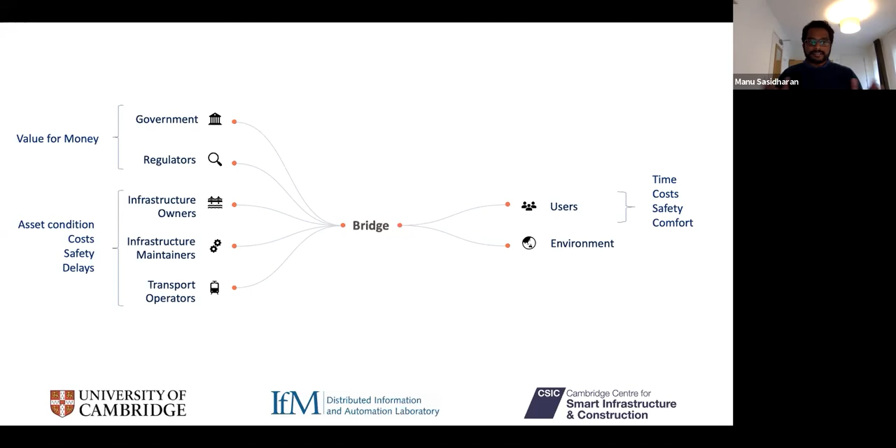So ideally, a single bridge will have multiple stakeholders who will have different priorities from that. And these multiple interests need to be captured and considered while managing the bridge to improve the value of our transport system. So why is it necessary? Because when we are setting up a business case for monitoring or any other decision within our asset management strategy, it is necessary to see how it impacts our different stakeholders, if it benefits them or how it impacts them.

So managing transport infrastructures or bridges are often considered at two levels. One is at the network level, another one at the project level. So while the budget availability drives the decision making at the network level, the engineering or the asset condition or even the structural health of a bridge triggers maintenance interventions at the project level. But knowledge on the actual condition of the asset plays a very important role within decision making at both levels.

However, what we see is that due to infrequent inspections and lack of continuous monitoring, we often do not have adequate information on the condition of the bridge. For example, in terms of defects like bridge scour, we do not have much information because inspections are quite less, or the frequency of the inspections is quite large. So this gives rise to uncertainties within our decision making.

So the visual inspection, which is commonly used, is less accurate, and continuous monitoring using sensors or satellites gives us a better value because it enables a smarter and a proactive asset management. But again, as Jennifer mentioned earlier, there is a lack of a business case for monitoring bridges and managing them effectively under such constraints of budgets or resources.

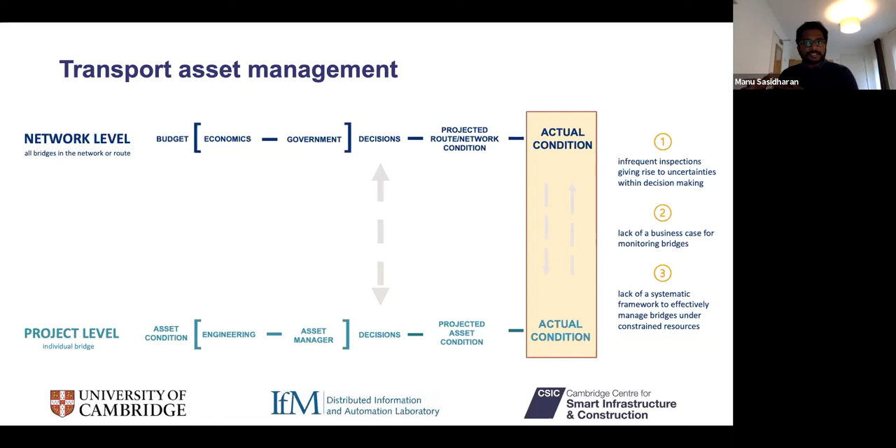So we have developed a risk-informed approach to arrive at such a trade-off. So the trade-off between the costs and the value of information gathered through these different monitoring techniques against a given risk level of failure of a bridge. So in other words, preparing the business case for monitoring.

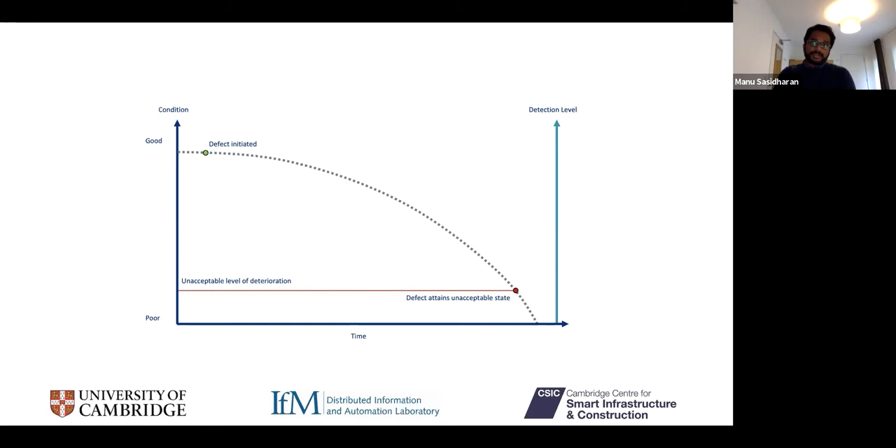So let us consider this situation where over time, a defect is initiated and it will reach a point where the defect attains an unacceptable state, which might result in a risk of failure or closure for a prolonged period of time. So with impacts of climate change coming into picture, these defects might attain that particular unacceptable state at a faster rate, for example, in case of scour as well. So it might become detectable during a detailed examination or monitoring before it is detected during a visual inspection.

So for any bridge, the level of detection is related to the structural form of the bridge. It dictates whether the relevant bridge elements that we are going to monitor, be it your pier or your deck, are accessible for examination, and to what extent they are accessible. And also to what extent does that particular defect, be it a crack or scour, manifest itself visually?

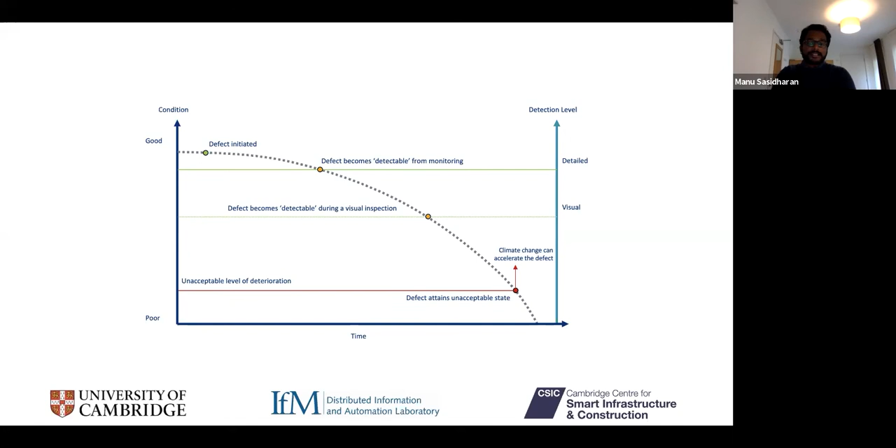So as we mentioned earlier, a visual inspection would have a high level of detection for a crack on a masonry arch, but a much lower level of detection for bridge scour. So the earlier the defect is detected, as we all know, or even predicted to occur, the better it is for maintenance and repair regimes in place.

But in case of the UK, we cannot take bridge safety for granted. And as we said earlier, the condition of the asset drives decision making across the network and project level. And we have a lack of comprehensive asset condition data when it comes to bridges. Approximately 40% of our 160,000 bridges are historical assets. And with a current annual maintenance backlog of approximately 4 billion, one of the major challenges that we are facing is to make our bridges resilient to a changing and uncertain climate.

And with climate change coming into the picture, it was reported that 1 in 20 bridges are at high risk of failure by 2080. So bridge asset managers often need to make decisions on the basis of incomplete and uncertain information due to the lack of asset condition data or even continuous monitoring.

But while we commonly employ visual inspection, which is less accurate when compared to continuous monitoring using sensors, it was estimated that spending £1 on infrastructure monitoring technologies on our bridges or even transport infrastructure could result in a potential cost saving of over £3.

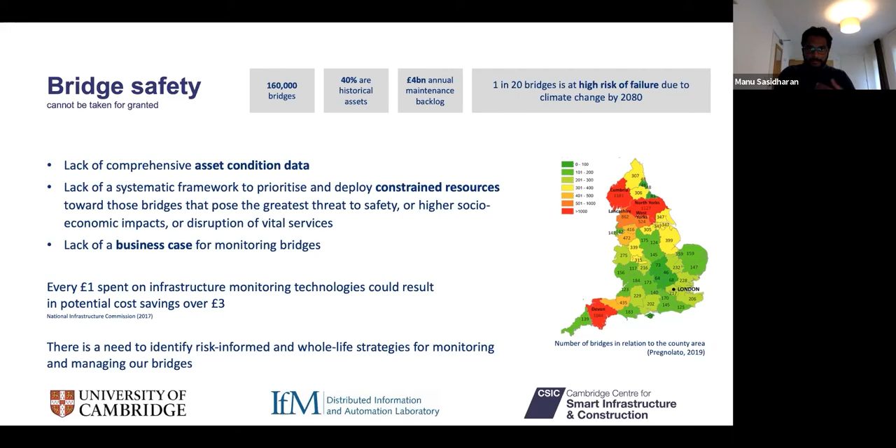But having said all that, we do not have a business case or a systematic framework to see where we can prioritize that monitoring investment. It is often the case that we say we are going to monitor the high-risk bridges first and then go on. But even within that high-risk category, which bridges do you focus on? So that's the question we are trying to address. We developed a risk-informed and data-centric approach that would allow us to make that value-based monitoring decision.

To take a step back, when we are assessing and maintaining our bridges, or even preparing a business case for any of these asset management strategies, a very sound understanding of the operational impact of that particular bridge, or the consequences, is necessary within the so-called risk assessment.

So in case of extreme events like a bridge collapse or flooding, which might result in lane closures or damages to bridges, the unplanned loss of transport capacity could necessitate traffic redistribution for a prolonged time. That redistribution could be rerouting road to road, or people moving from road to rail, or if it's a rail bridge, rail to road.

So you have that modal change, which brings its own complications of increased fuel emissions, accident risks and congestion. On top of it, it could also bring a significant increase in user cost due to longer travel distance. Prolonged disruptions can impact not just user cost but also local businesses in that area, and might even bring a risk of social exclusion to the affected communities if you are cut away from the mainstream for more than a couple of weeks.

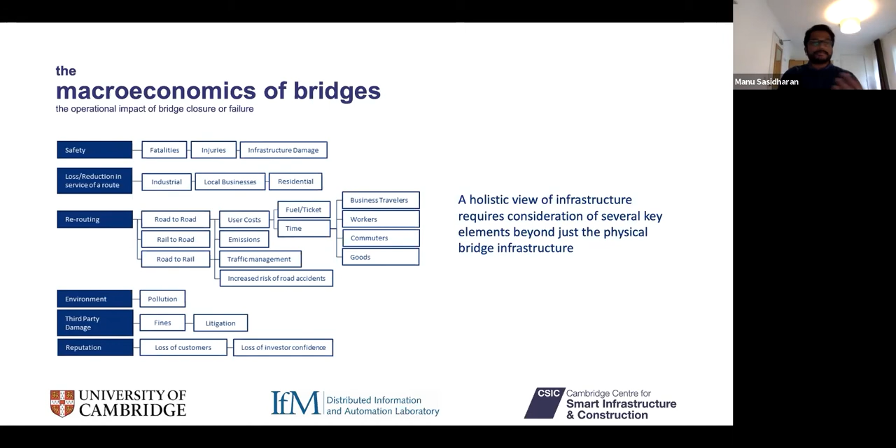Now, probably the only quantified example of these macroeconomic impacts of bridges would be the Forth Road Bridge closure, where it was closed for 3 weeks due to structural defects, and resulted in a detour of 40 minutes for around 10,000 households. It was reported that this journey increased from 40 minutes to 3 hours because of the increase in congestion.

We also see that because of the increase in time, there was a shift of car and bus users to railways, so additional rail services had to be introduced to meet that demand. Finally, the closure of one carriageway alone was expected to cost the Scottish economy around £650,000 per day.

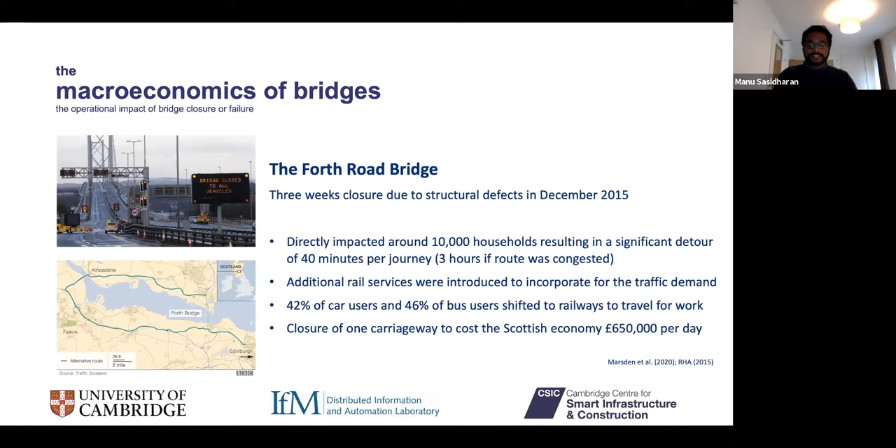So given the values we see for bridges within our transport system, like that example, it is quite important to be able to predict these kinds of consequences, and not just predict but also quantify them, so that we know what impact they would have. Considering such impacts will aid transport agencies like Network Rail, Highways England or local authorities to identify user-centric and value-based strategies for maintaining or monitoring their bridges. A key part of such a process is to identify the bridges at most risk while considering their operational, structural, functional, and environmental standing.

And that could be not just overarchingly for a bridge, but for a particular defect. For example, if you take scour as an example there, you might find that some of those consequent factors which result in scour might bring in a higher risk versus a crack. So I'm talking about a generic approach here.

So since the likelihood is governed by these different contributing factors, the magnitude of these consequences is often mediated by the life cycle costs and the macroeconomic impacts that we discussed earlier. So what we're thinking is that the value of information approach will provide us a standard for acquiring and using data while carrying out any of these management activities.

So it will help us to understand what is the best monitoring strategy for a bridge assessed to be of a particular risk, or even identify which bridges to monitor and to what level they should be monitored, or even what should be my inspection frequency if I'm not going to do any monitoring. So that discussion happens when we bring those approaches together.

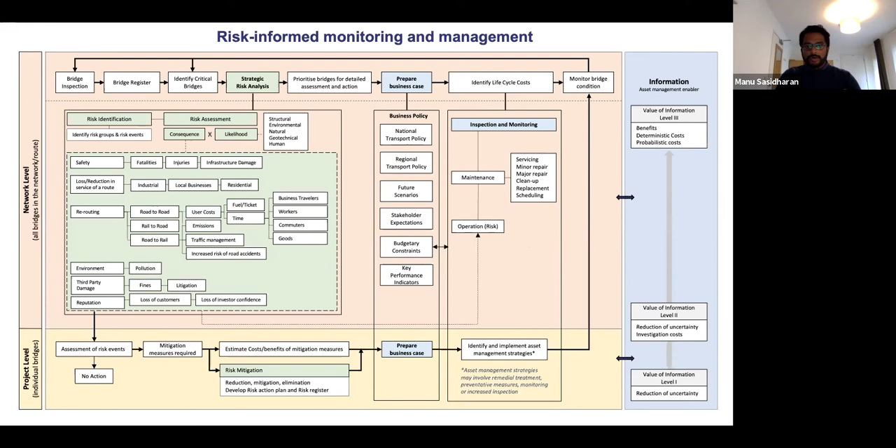So you might find that when you prepare a business case and compare it while having a whole life cycle perspective there, you can identify strategies like, okay, I'm going to monitor or increase the inspection of my bridge, or even bring in remedial treatments or even preventive measures.

So with that framework, we have had discussions in the last couple of months with Network Rail and Highways England. That whole framework, as you saw earlier, was developed with inputs from them as well. And during our discussion, predominantly with Network Rail, they highlighted that their current scour risk assessment process is unable to quantify the impact of climate change. I should mention that we said we'll have that framework and then bring in scour as a case study to explain it. So Network Rail said we do not consider climate change there, and we are starting to think about it.

So we're now working with Network Rail to explore the relationship between climate change and bridge scour by simulating the causal chain from climate change to the scour risk, so the whole risk assessment process, trying to see how climate change will impact that. To start with, we adopt the UKCP18 projections to study the change in precipitation in the coming years under different scenarios.

And then we employ hydrologic modeling, which will estimate the river flow based on terrain, land use, and soil conditions, which would inform our time-based scour deterioration models, which we are adapting from literature to calculate the scour depths for these different climate scenarios in the future. So having done those three steps, it would then inform our risk assessment process, which will consider the probability and the consequence of bridge failures due to scour, both at project and network level.

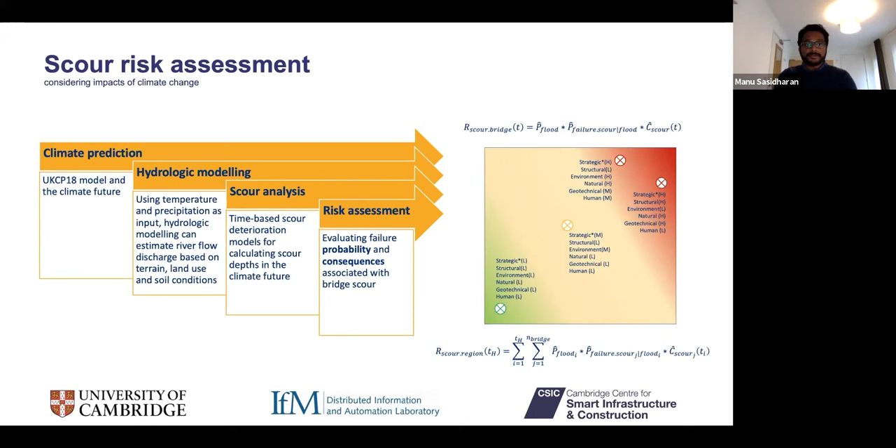So again, the probability will be calculated using a pairwise comparison approach of different contributing factors, and the consequences will be calculated using econometric models, which consider the macroeconomic impacts. So that's one project which we have started with Network Rail to validate the framework and the approach that we have developed.

So from that picture, we then start to ask, how can we deal with scour? The efficient and cost-effective way of dealing with scour is to monitor its evolution over time, and accordingly decide how to bring in maintenance and repair works. The commonly used bridge monitoring technique is visual inspection, and divers are often employed to inspect the condition of the foundation and to measure the scour depth using basic instrumentation.

But such an approach is particularly a disadvantage during flooding, or even in situations when climate change induces high floods, where the risk of scouring is extremely high and diver inspections cannot be carried out due to health and safety considerations.

So an effective alternative in such a scenario is to employ instruments such as accelerometers, sensors, or satellites to gather data related to scour depth, and not just the data about the scour depth, but also the different factors that contribute to scour formation. Can we look at how the surrounding area or the terrain of that area impacts how the scour behaves? That sort of information capture will help the decision makers.

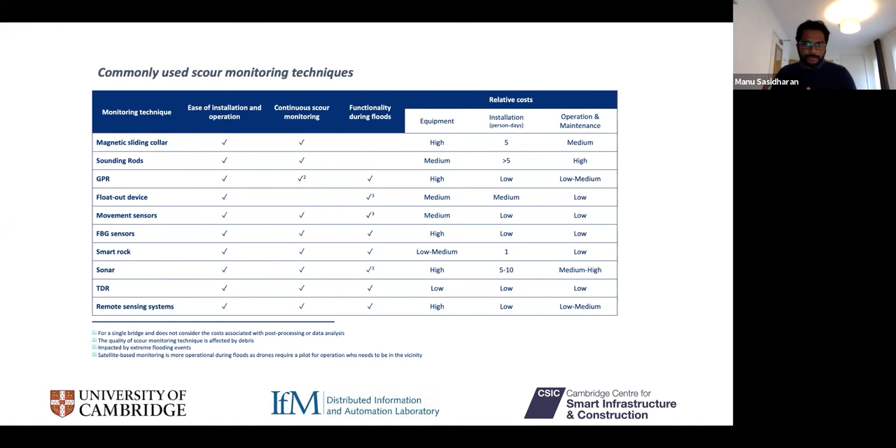But having said that, from that list of different techniques that we have, each technique will have a different level of cost effectiveness, resolution, or capability for providing repeated and reliable information. There might be a different cost when it comes to installation or even operating and maintaining it. So how do we choose which one to go for within our risk assessment framework?

To that end, we developed a value of information technique, which is a decision analytic method for quantifying the potential benefit of additional information. Thinking back, the essential driver for infrastructure sensing or monitoring is to create a value of investment versus the gains you might gain downstream if the sensors are put in place. For example, if I'm able to detect a defect due to monitoring, and if it is an accurate detection, then it would trigger a maintenance decision much earlier than a visual inspection, and accordingly help reduce the failure risk or even closure risk. So what's the benefit of getting that initial information?

For new structures, like the bridges that HS2 might have, the emphasis might be on giving an early warning detection system of deterioration happening or a defect going to happen. While for existing structures, which is predominantly what we have, the emphasis will be on the monitoring of the already active deterioration processes, trying to see if that deterioration process is getting aggravated, getting that live feed, if that's the word to use.

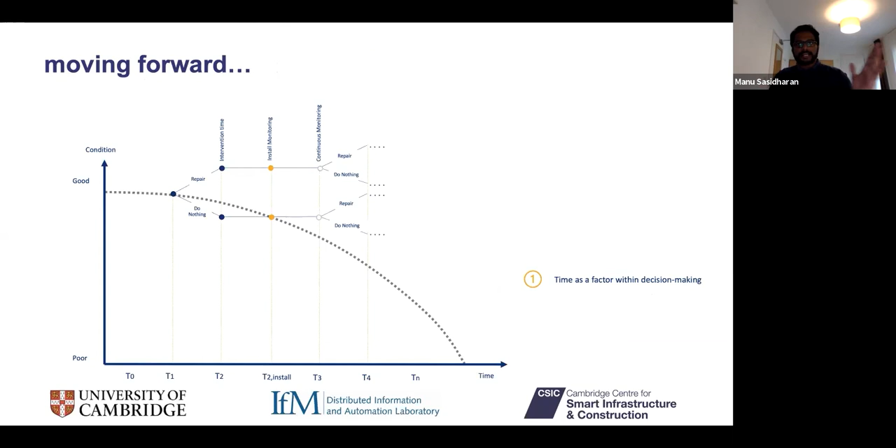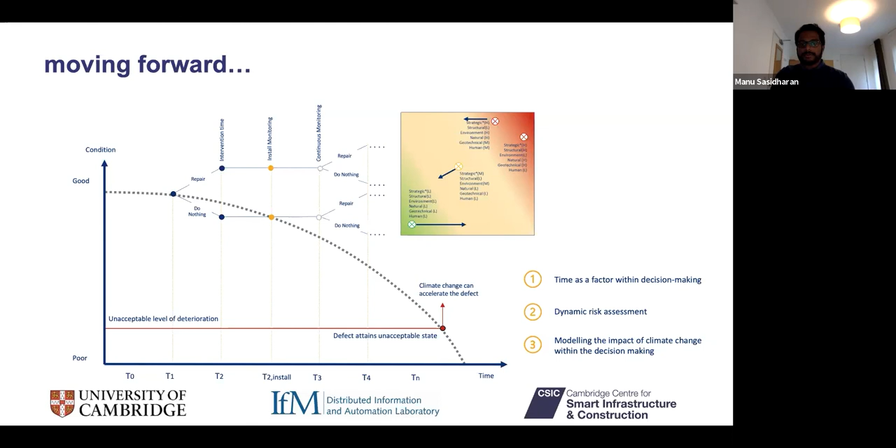Moving forward, the work will firstly look at making the proposed approach time dependent, which will also help us understand how this time dependency affects the value of our asset, and also if monitoring was initiated at different stages. Dynamic risk assessment is also being looked into, to make risk assessment a function of time. And finally, as we said earlier on the Network Rail project, we're looking at climate change impacts and will ask what it means for the value of monitoring. As for outcomes, we're working with Network Rail and Highways England to trial these developed approaches, predominantly for bridge scour. Thank you very much.